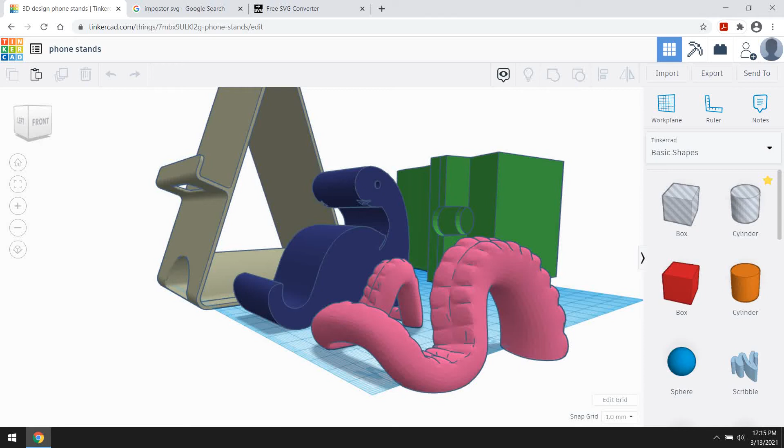Right here we have these three starter files, which if you're in the live meeting, I'm sharing with you. And in the first video, we made this other one. But I want to try something different. I want to capture an image.

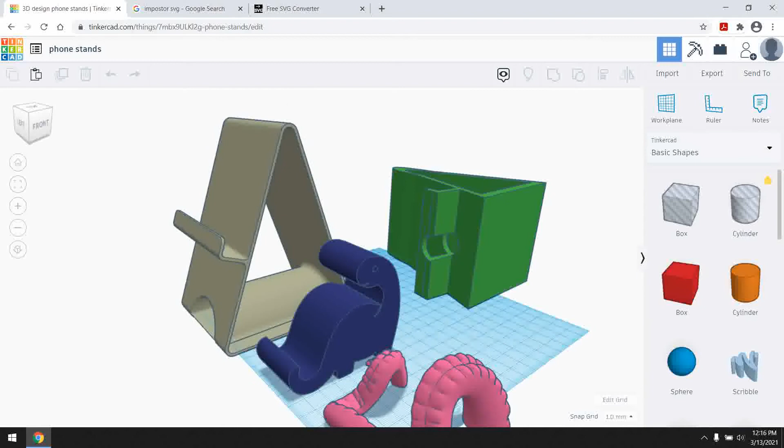So check this out. I went and just did a Google search for impostor SVG, and I came up with, I'm just looking for a nice black and white drawing. So I got this one. I had to take a screenshot because it's doing this annoying thing where I can't just save an image. But anyway, once you have an actual image file, like a JPEG or a PNG or something, you can take that and convert it to an SVG file, which is something we can load into Tinkercad.

So I usually use picsvg.com. And all you have to do is upload the picture. So after I cropped that picture here, this is what it looked like. And then you can change these filters here. In this case, I don't think the filters are making too much of a difference. Oh, well, session ended. Anyway, you'll see the different things here. And then you can download the file, which I already have.

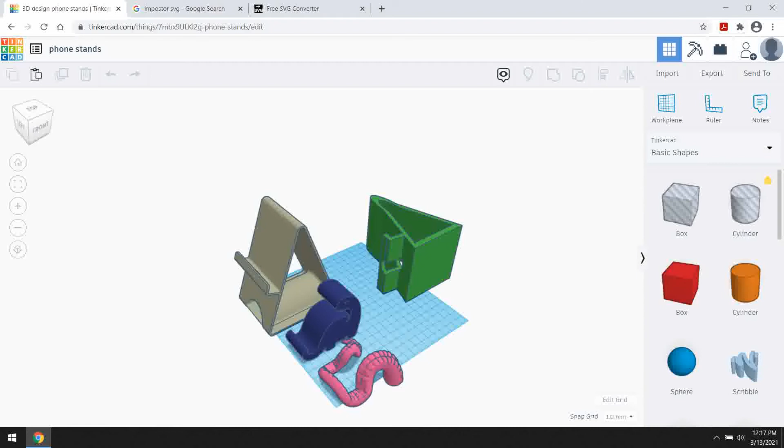So let me show you what that looks like. I'm going to import that converted image file. Just going to throw all this other stuff off to the side. Cool, so we have this image. You could also try to draw this with the scribble tool, but I'm just going to use this as is, as a phone stand.

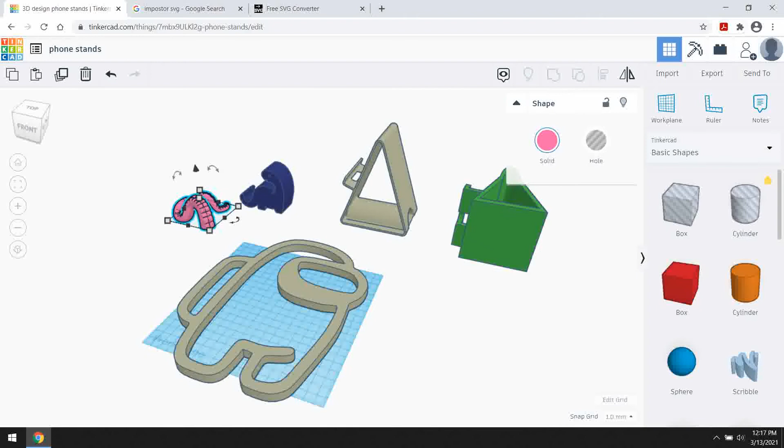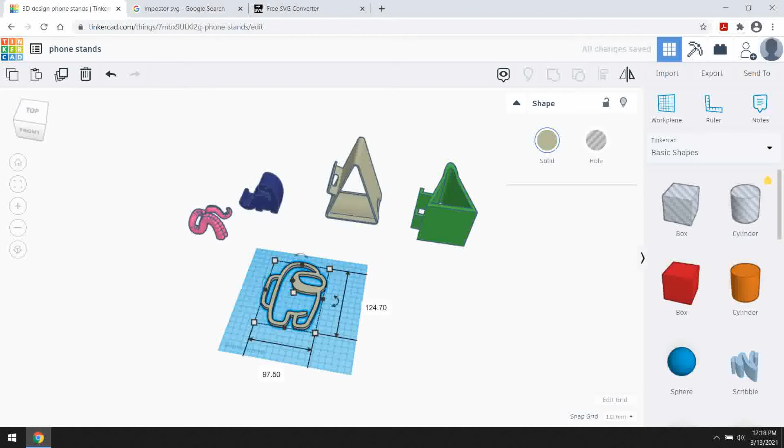So what do I do? I'm going to shrink it down so that it forms the back panel of the phone holder. So I guess I want it to be about the same size as one of these back panels. That's about right. So this is 132 by 103. That still seems a little big to me.

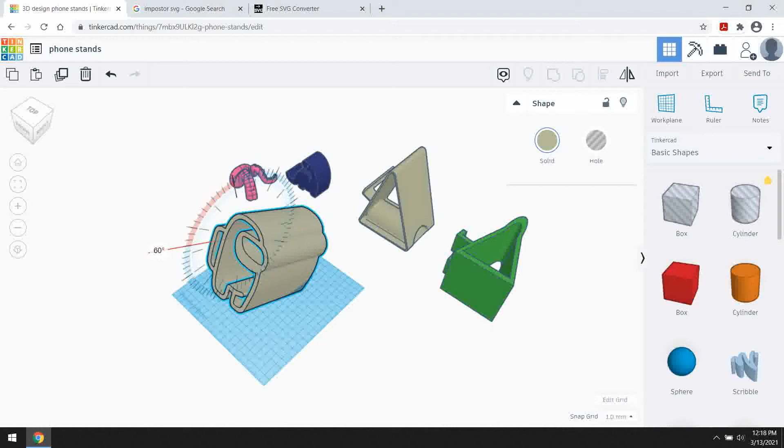Fine, and I'm going to stretch it way up. You may not understand why I'm doing that just yet, but it'll become clear. So, yeah, actually, let me just show you this. So I'm going to tip this along the outside. And what do I want? 60 degrees? Do I want it to tip back 30? Is that about right? I think that's about right compared to the other styles.

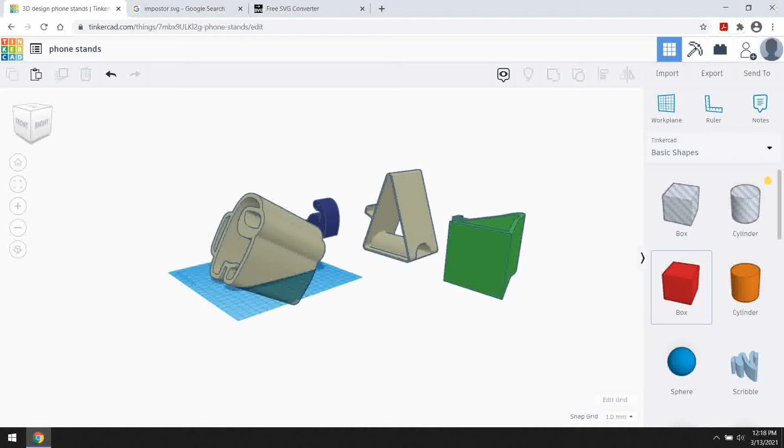Cool. So I'm going to go ahead and lower this until the image is just barely sticking up off the ground. I'll cut away the extra part later. That's fine. But right now, what I want to do is create the scoop to hold the phone.

So I'm going to stretch a box. I'm going to flatten it to about 10 or less. You could go less than 10. We'll say 8. That's good. And I want it to be at least 20 wide.

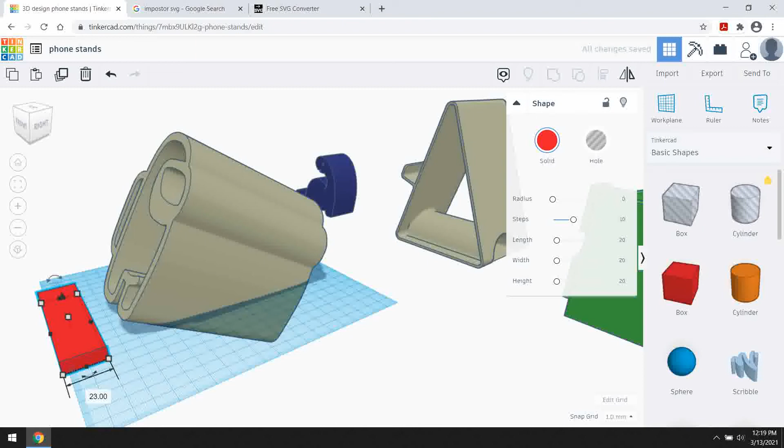And then once I have that, I'm going to copy it or Alt drag. I'm zooming in with the F key, and I'm going to rotate one piece 90 degrees. Hit D to get it on the surface, and just, it doesn't need to stick out too far. Oh, except this part, you need that full surface there. So you should have at least about, right, this is 23 millimeters across, or a little less than an inch, which is about right.

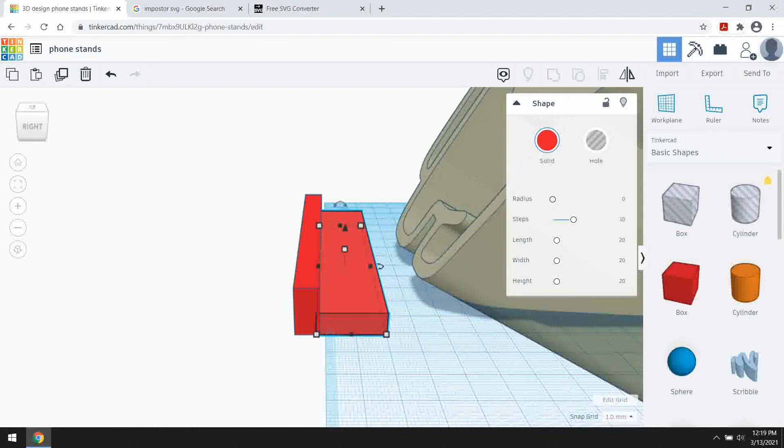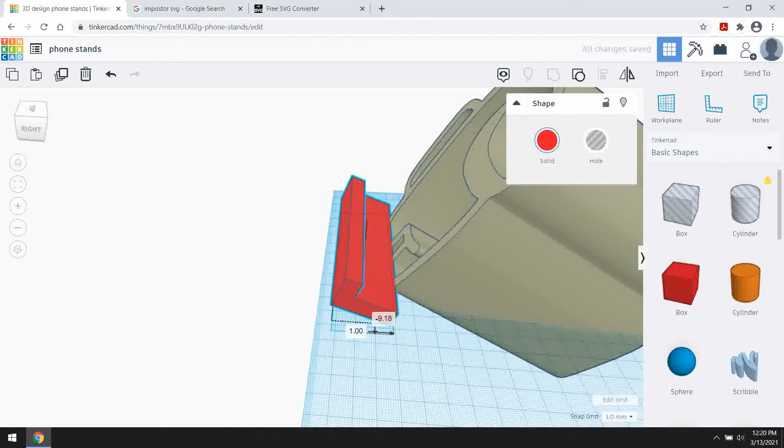So I'm going to group these two pieces together. I'm going to tip these back. I think 30 degrees is what it's going to take to be exactly perfect, but maybe let's not go quite that far. How about 22.5? Well, anyway, that's fine. And then I'm going to lift it up off the ground slightly. I think that's too far. That looks very nice to me.

Let me just center it a little bit better. So the idea is that the phone would sit there and lean back.

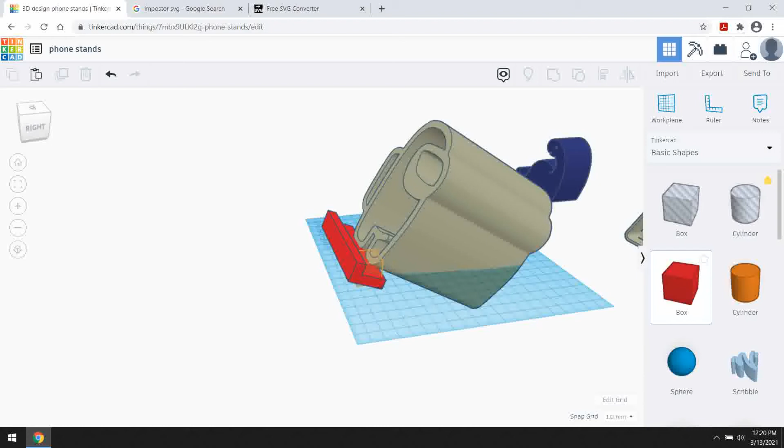Let's just put another box here just to create a bottom for everything. So let me actually put it off to the side first. I'm just going to make it big and kind of flat. Let's say 7 is fine. I was going to say anything less than 10. And I'm going to shrink it so that it doesn't stick out on the sides. It's fine at this stage if it sticks out the back.

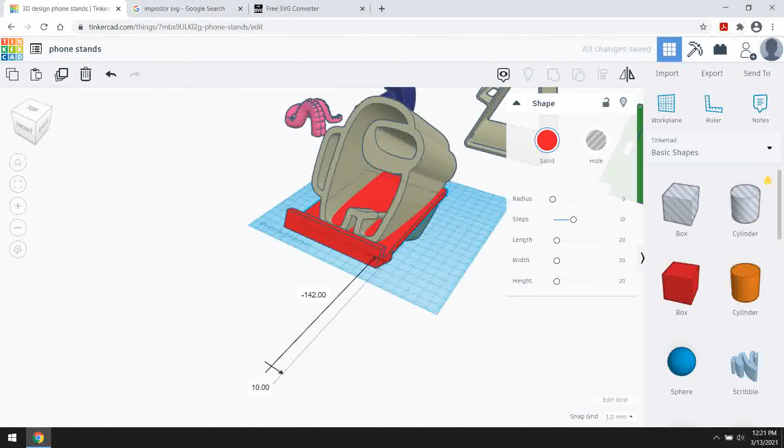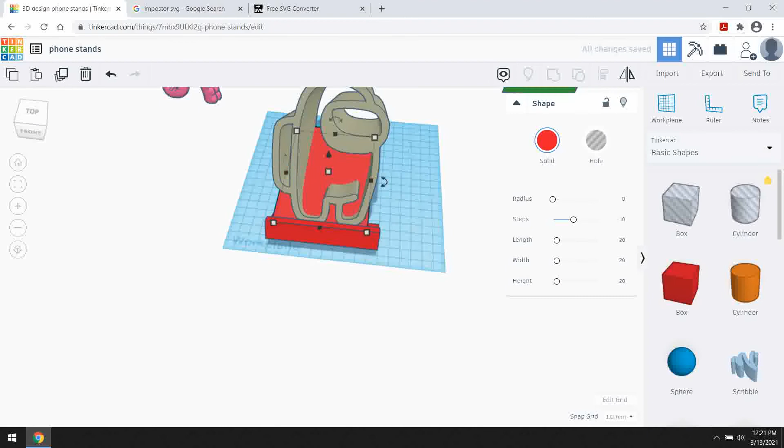Yeah, that's pretty good. In fact, I could probably make this a lot. It doesn't even really, it just needs to be wide enough to hold the thing, so I can even make the back end a little bit skinnier. That's good.

Great, so I'm going to group together what I have, and it should all become the same color. And let's make it a nicer color so I can look at it.

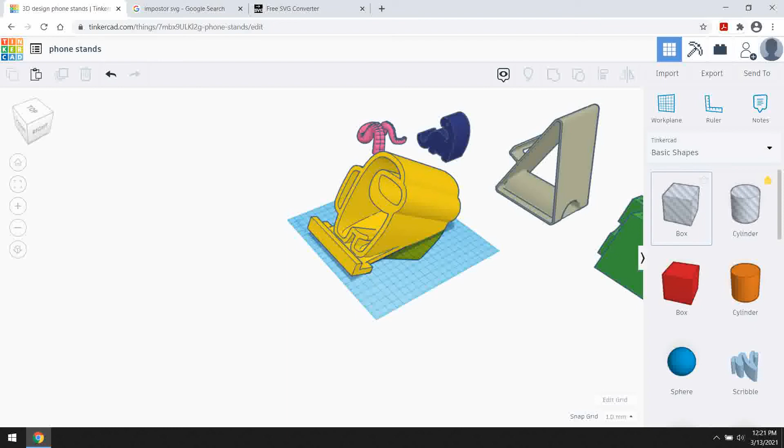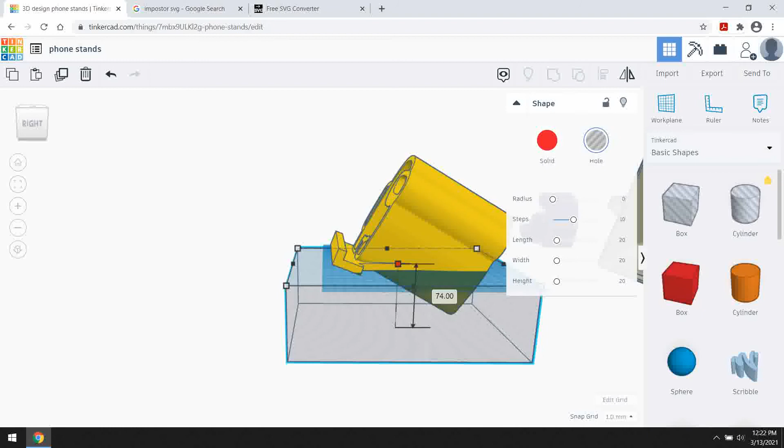Great, so how am I going to slice off the parts of this that I don't want? I'm going to take a box, first of all, stretch it big, stretch it at least big enough to cover all of this, and I'm going to lower it until the top of it is even with the work plane. One quick way to do that actually is to drag the height negative. And I'll just drag it way negative. So I now have a hole shape that goes only up to the work plane.

And I don't think it's overlapping with anything else. So I'm going to go ahead and group these two shapes, and that should slice off the bottom. And we have a nice flat bottom to use right there. That's good. That's important for printing.

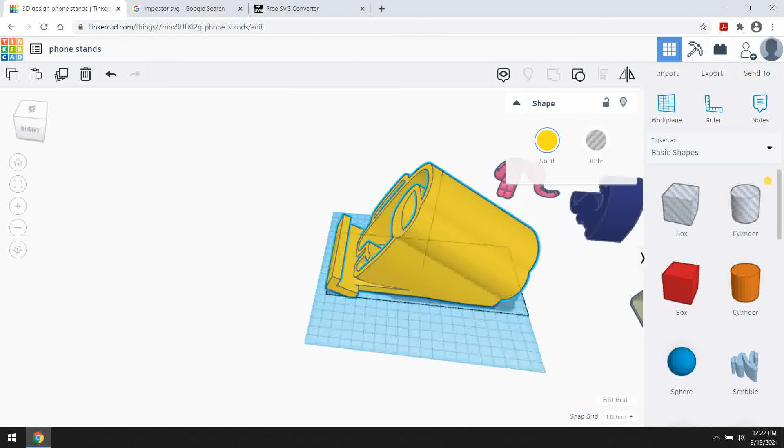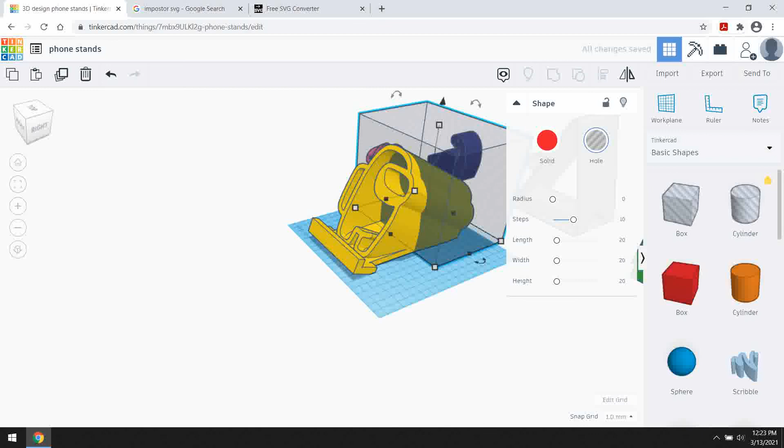Also, the back goes too far back, so we're going to do something similar. I'm going to take a box, make it big, stretch it up high enough, and make it overlap with the figure. Leave a little bit on the top there because it needs to be at least thick enough for that top part to form properly. Remember that you're printing with liquid plastic.

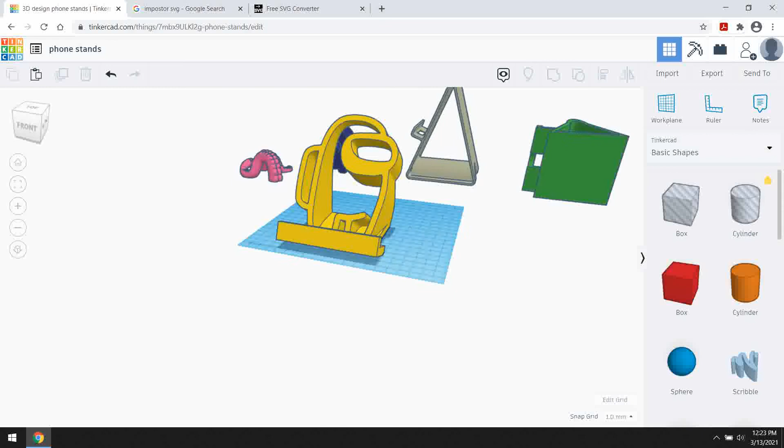So I guess that's pretty good. I'm slicing off the back all the way. Neat. And, you know, I definitely would have a chance of printing this correctly like this. I might... Yeah, that's good. That's good.

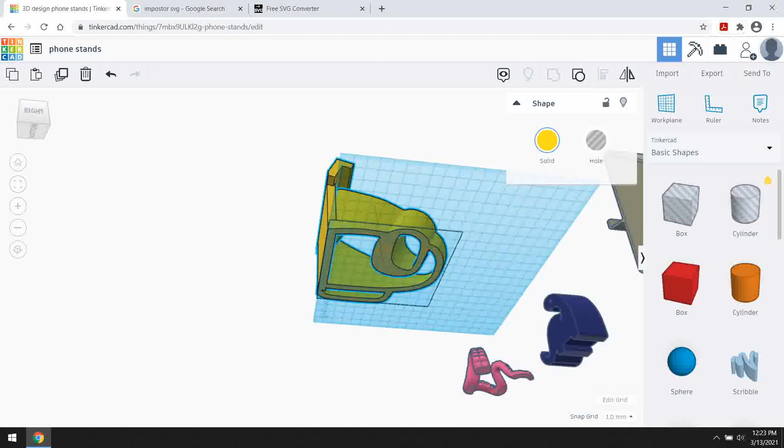Because if I tip it, let me explain what I was thinking. If I were to tip it this way, then we have an issue trying to print this part up here, even though the bottom would definitely print great, and maybe even a little better. But I think we can handle this angle going up like this on the printer. So I'm just going to hit D one more time to get that on the surface.

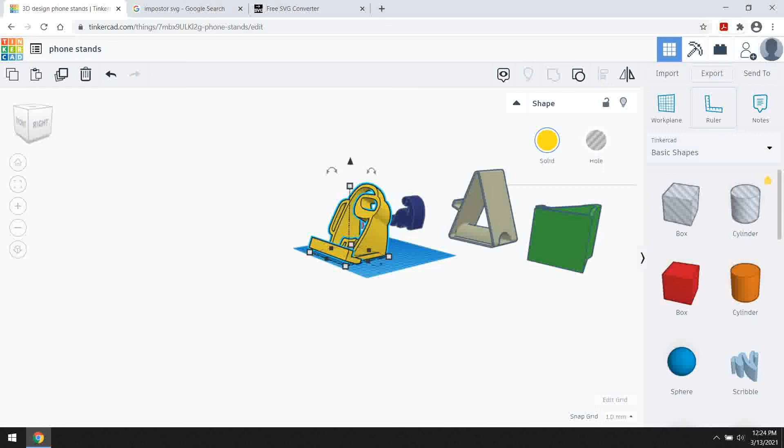So now we have an Among Us style phone holder. And I am going to just use the selected shape to download that STL file. The end.